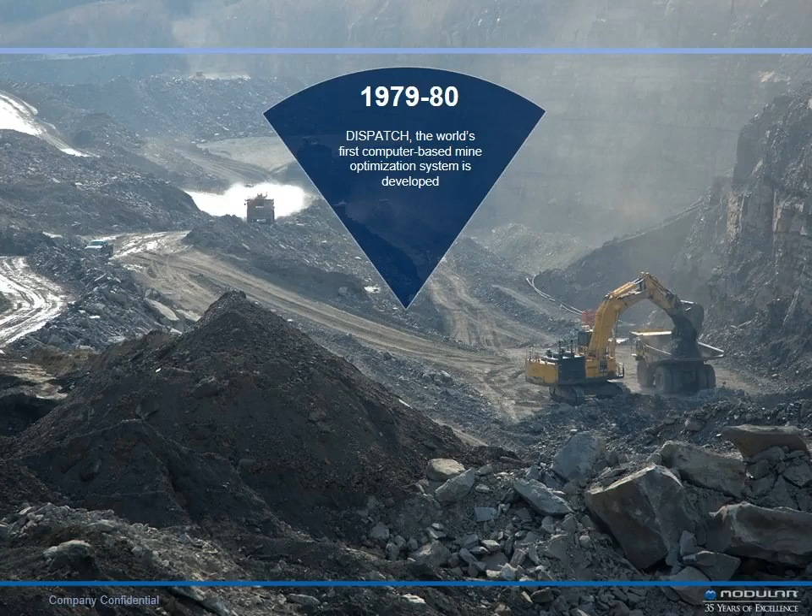So first, 35 years, if I can subtract adequately, that means 1979 is when we started. Shortly thereafter, in 1980, we launched Dispatch, the world's first computer-based mine optimization system.

The next few slides here will go by decade. In the 1980s, we implemented the operator interface panel and RF signpost beacons, and the first Dispatch underground system was commissioned.

In the 1990s, GSP Modular Ready interfaces were released, and today we have far and away the most interfaces on the market, meaning we integrate with varying equipment types. We also released field solutions with GPS technology. That was at the dawn of GPS. It's so ubiquitous today it hardly seems worth mentioning, but at that time it was rather substantial.

In the 2000s, we became part of Komatsu, one of the largest heavy equipment manufacturers in the world. We co-developed with Komatsu the front-runner autonomous haulage system, which may be on some of your sites. We expanded our OEM interfaces to over 100, our mining services division was formed, and we were installed in our 200th mine.

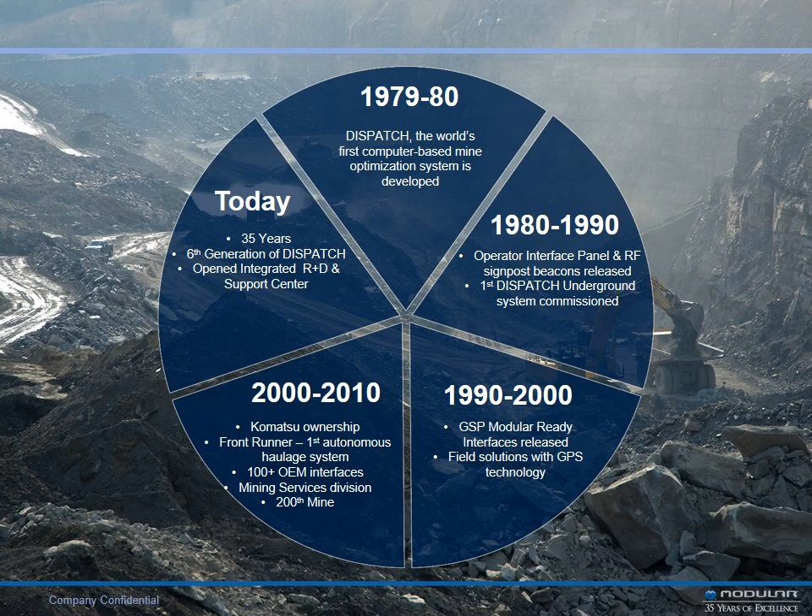That brings us to today, 35 years in business. We're now on our 6th generation of the Dispatch system. Recently, I believe in February earlier this year, we opened our brand new Research, Development, and Support Center here in Tucson, Arizona. Those are some of the achievements. There are many more, but to keep it brief, we organized it by decade to show you something brief.

What we haven't done is show you some of the results. We focused on products, global presence, etc. But here are some of the outcomes from those products and offices in our 35 years in business. We've labeled them according to what we feel we've accomplished and established with our customers. The first is trust, and we feel confident we've established the trust of our customers because we're in 18 of the 20 largest mining companies in the world.

Next, results. We've proven production at 240 plus mine sites. Each of these follows a rather linear progression. This data was surveyed via our internal resources and our customers, so that number is right: 70 billion tons of additional production due to our Dispatch system. It's not often you say 70 billion.

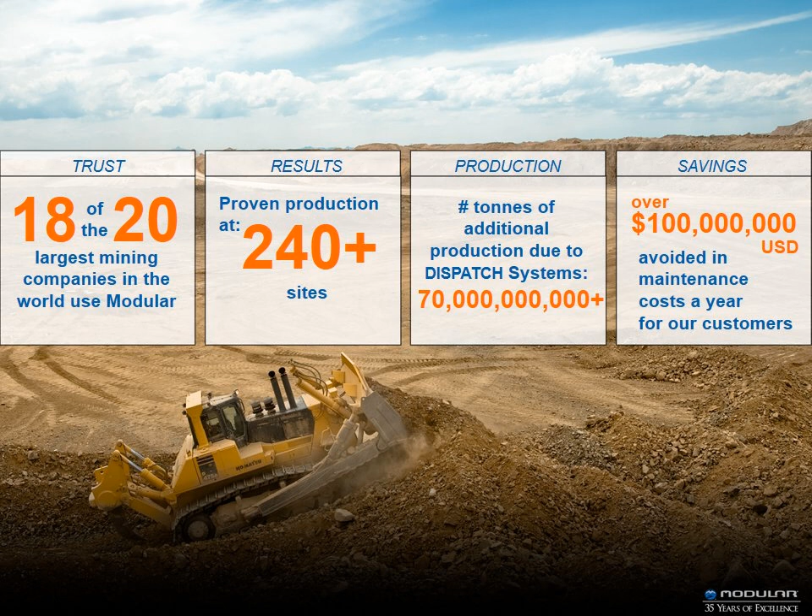And finally, what matters most: savings. With our solutions, we've saved our customers over $100 million in maintenance costs. We think that's substantial.

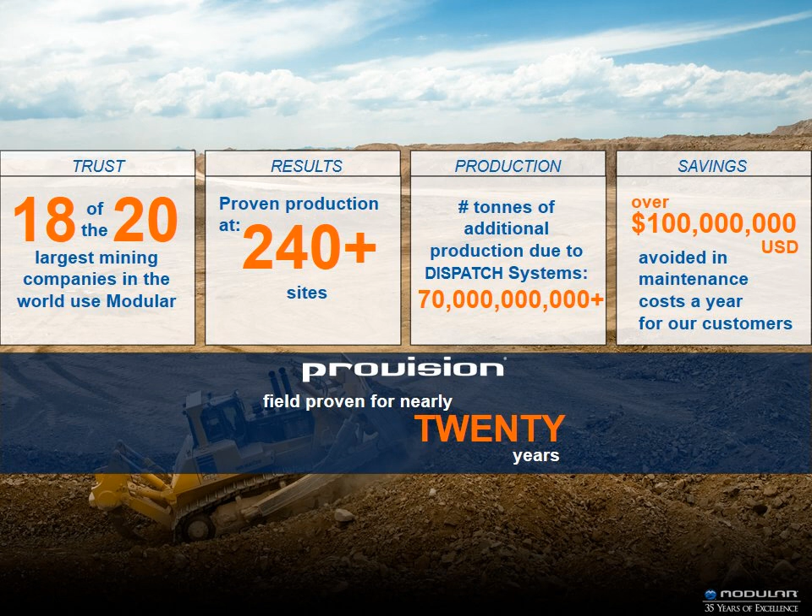And finally, to segue into our topic today, ProVision. ProVision has been on the market for nearly 20 years, and in that time we've provided integrations with heavy equipment like loaders, shovels, dozers, and of course drills, the topic of today's presentation.

So without further ado, I would like to hand it over to Bill, who will go into more detail about machine guidance and specifically our drill system. Thank you, Eric.

Welcome everyone. Let's talk a little bit about machine guidance in general before jumping into the drill. You want to jump? Actually, I can manage this, can I?

We've already talked a little bit about our history, so I won't go too deep on this, but you can see how ProVision kind of starts for us back in the mid-1990s. We were pioneers in this area. We were the first to offer a shovel guidance system before it was actually called ProVision, and we were the first to use augmented GPS, meaning GPS plus the Russian GLONASS satellite system.

There are a couple notable points through this history. We added drills in '99, we added dozers in 2001, and the product line continued to expand. In 2003, that was our first major system redesign, so you could consider that the kickoff for ProVision 2, the second generation. That was Masterlink technology, when we moved to Wi-Fi for higher speed communications and higher bandwidth. In 2009, we added the backhoe, which completed the product line we have today.

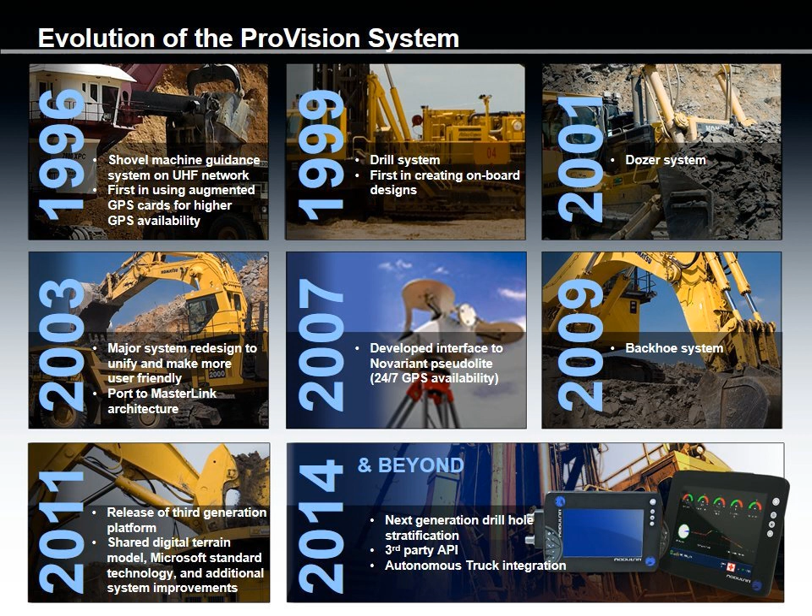For the future, we're working on a lot of different things. These are just a couple of items. Next generation hole stratification, that's actually something we're releasing now. We've got a third-party API for mine planning systems in order to work with different geology and planning systems on site, avoiding flat file transfers between those systems. And we'll be working shortly on integrating our autonomous truck management system into ProVision for the future.

So how does ProVision work in general? The concept is about all this information flow that you see here. It starts with mine planning. All of the information from mine planning is input through the Office application, things like design surfaces, polygons for material boundaries, hazard locations, work limits. All of these things are put in and shared with the mobile applications in the field based on their positioning, so when they need a particular set of data, it's provided in real time over the network.

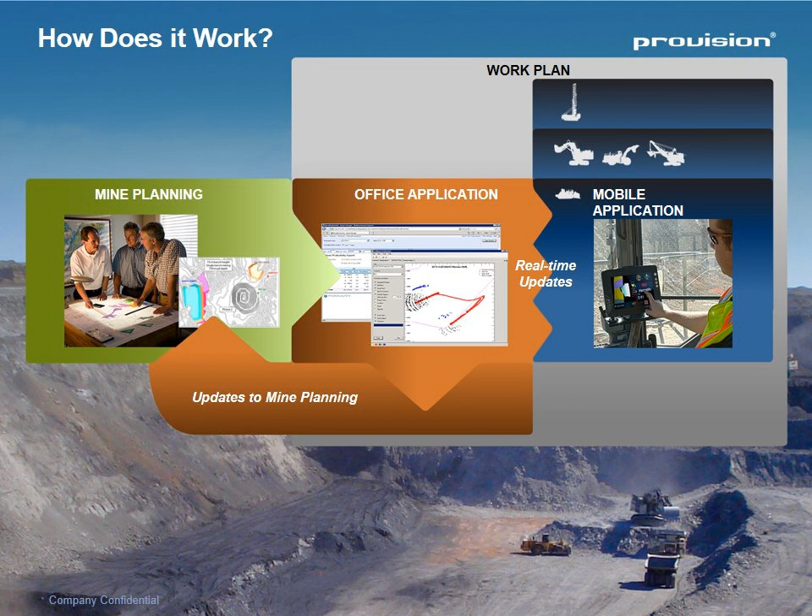And this feeds back into mine planning, where they're able to pull out this data, update their models, or run reports—there's also a set of reports included in the system. So the point here is that the mine plan updates the work plan, and the work actually going on in the field comes back and continues to update the mine plan. So there's this circle of communication which is constantly going.

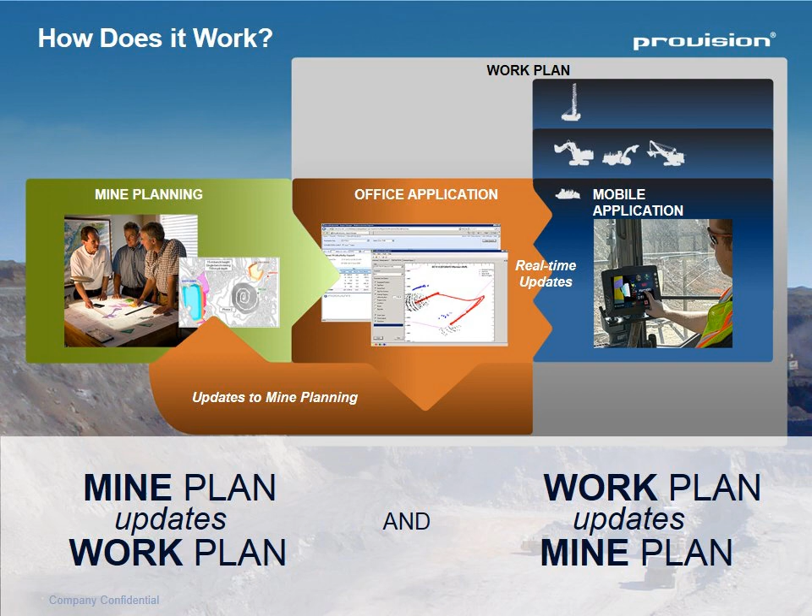So basically, a couple major points here for ProVision in general. The whole point is to have a universal mine plan that's communicated out to the field and managed in real time, and this helps to ensure high levels of precision, basically that the work is done according to the plan.

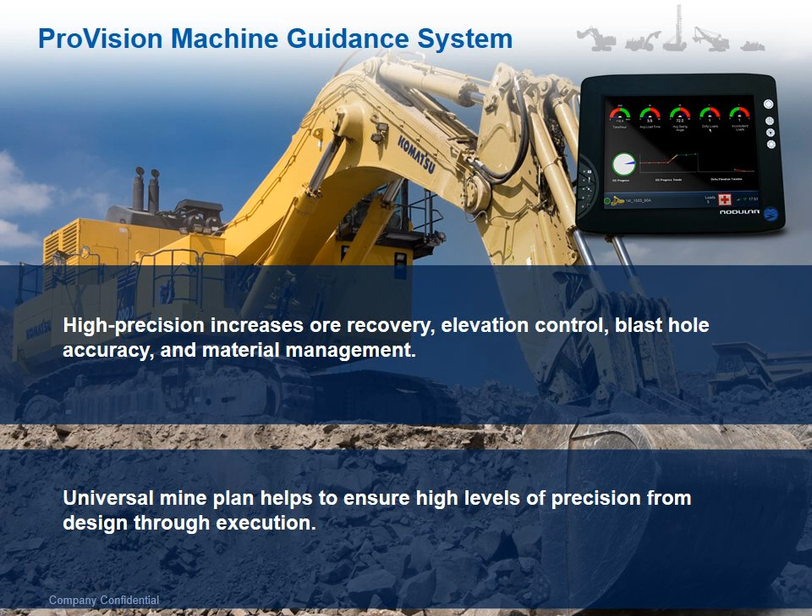And the high precision itself is used to help operators increase ore recovery, maintain control of elevation as the machines are working, drill holes accurately, and manage materials. Those are kind of the major functions of the system. And the system provides comprehensive reporting through dashboards and KPIs, and a reporting substructure available in the system to help you understand what your operators are actually doing out in the field.

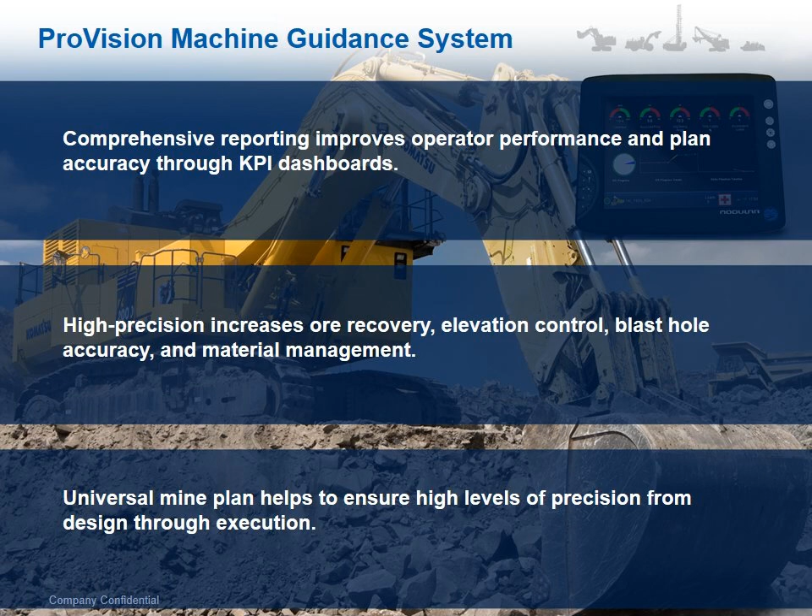Okay, so let's talk about the drill now. The drill is something I mentioned—ProVision 3 was released in 2011, but we've been doing it in phases. It's a big job to migrate all the different machine types we have—shovels, drills, dozers, loaders, and so forth—to ProVision 3 all at once. So we had a phased approach, and the drill is the part we completed this year and released in February. So the drill system in ProVision 3 is relatively new.

Now the purpose of it is essentially the same as it always was. Generally it's about allowing operators to drill precisely, showing them how to arrive at the holes and measure the depth as they're drilling in order to improve efficiency of the drilling rig and meet the goals established in the design of each hole pattern. The guidance is done through the application of high precision GPS or GNSS, which allows them to work during poor visibility and at night without the need to put stakes out in the field and mark holes. At least that's what you should be working towards.

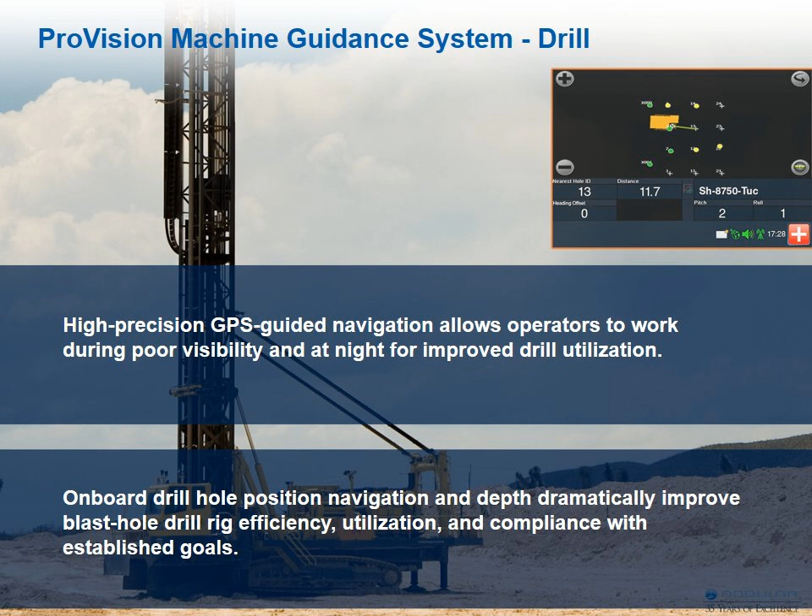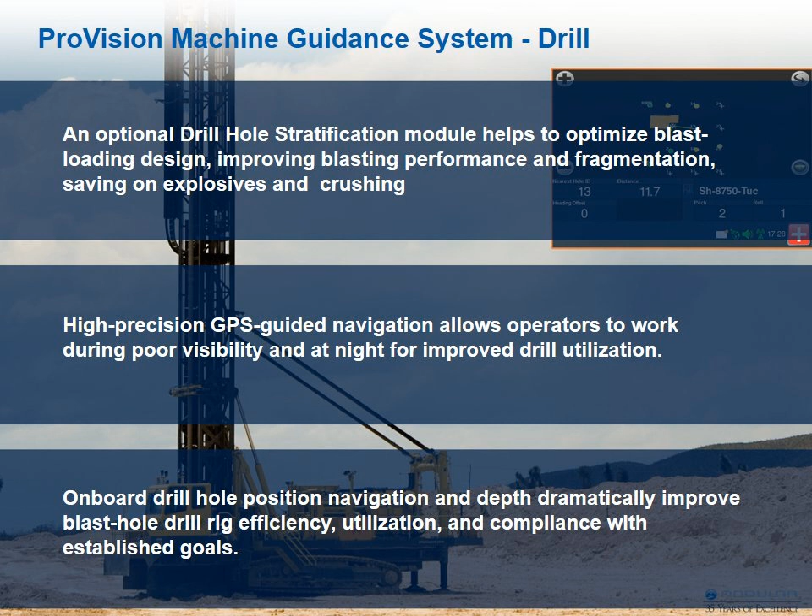And we have an optional drill hole stratification module, which I'll go into more detail on, which is meant to help optimize your blast by understanding the geology in each particular area where the hole is drilling. And there are some big implications for this as far as saving on explosive use and your ability to crush.

All right, so this kind of summarizes the list of benefits that the system provides. The biggest is real-time depth against the design. So basically, this is about better compliance to plan, making sure the drill actually drills down to the depth for each hole, and we're able to measure that very precisely and communicate that to the operator so they know as they're working how they're doing.

High precision navigation is a major piece of that. The positional accuracy can be as precise as 1 centimeter, depending a little bit on the conditions in the mine. The system is developed for the mining environment, and we have a lot of experience with this in our 35 years as far as making rugged equipment and being able to work in these conditions.

Stratification, which I'll go into more detail on, lets us use sensors on the drill, either OEM sensors or our own installed sensors, to get drilling energy per hole. That can turn into recognition of the strata of the hole, the types of rock you're drilling through, and help with optimizing your blasting.

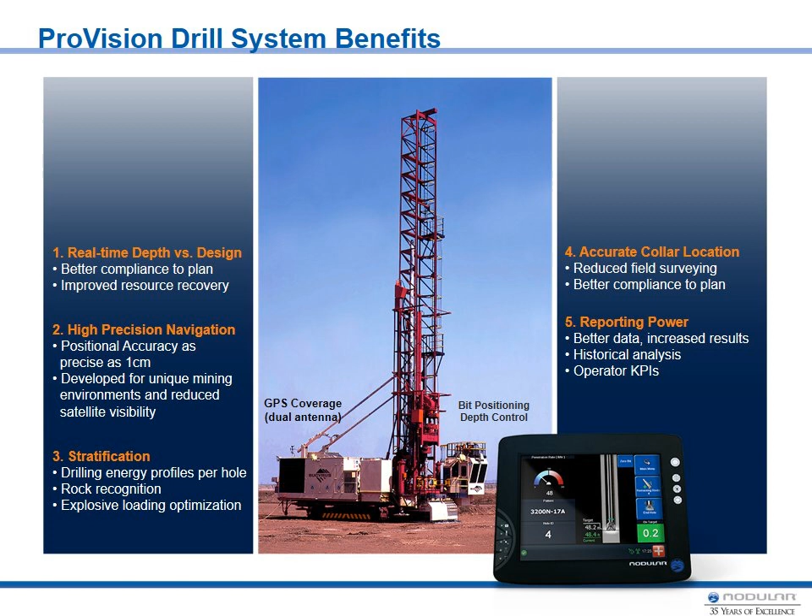Accurate collar location is about getting the hole exactly where it's supposed to be without needing to survey it and mark out in the field. And then reporting: with better data and better understanding of what you're doing, you're able to have better results. That's a fundamental piece of the system, providing that feedback and helping you understand how the operators are working.

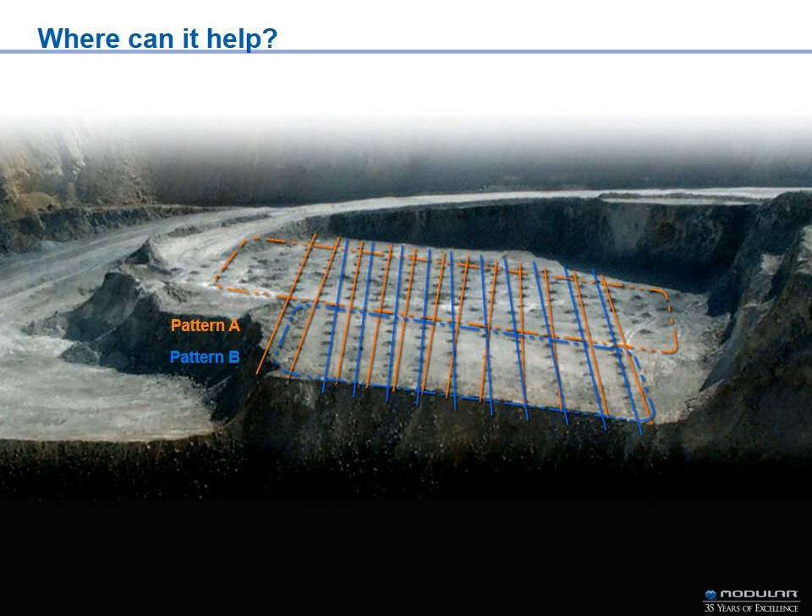Here's an example of what we're trying to avoid. I'm not sure what the circumstance was in this image, but you can see two different patterns here — the holes were drilled one way on one side and another way on the other side. The problem is this causes inconsistency in the spacing between the holes and can affect the quality of the blast, resulting in poor fragmentation, which then makes it difficult to actually extract the material. So we want to avoid this — we want very precise hole placement and depth so these blasts are as efficient as possible.

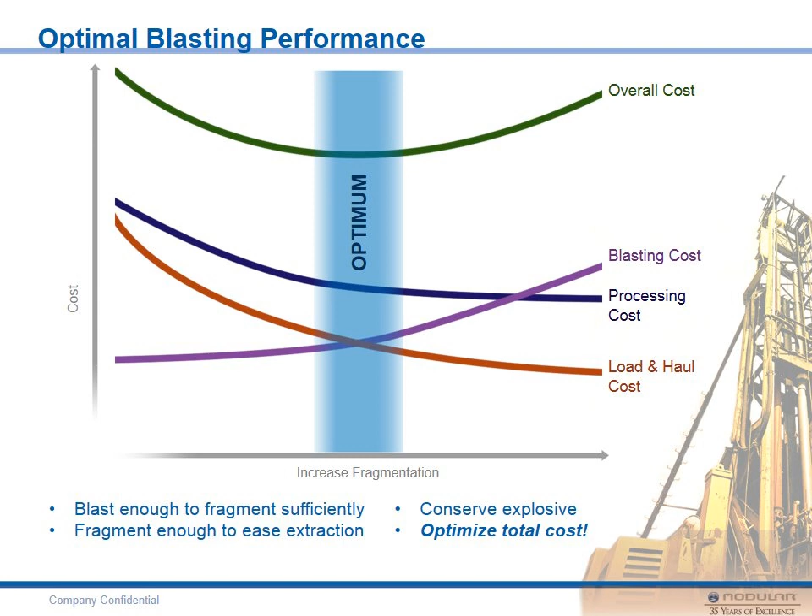So the point is to optimize total cost, and this is what the drill system using stratification can help you achieve. As for how stratification works, as we're drilling the hole, there's a lot of data we can pull from the various sensors on the machine.

Some of these sensors are part of interfaces we've developed over the years, which Eric mentioned earlier. We have a number of drill interfaces that currently exist for Atlas Copco, Bucyrus, CAT, and others. It's a little different whether it's an electric or hydraulic drill, but generally we use RPM, pull down pressure, torque, and penetration rate.

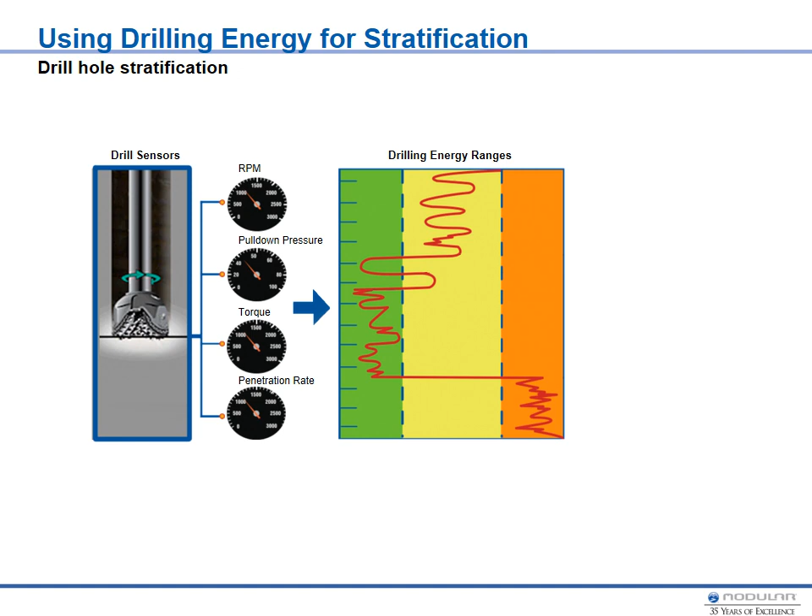By putting these factors together, we're able to calculate the drilling energy. If you look at this chart, it's flipped on its side — top to bottom corresponds with the depth the bit is at, and you can see the energy plotted, where more to the right is higher. Depending on the geology at your mine, you can define limits and understand that when the drilling energy is within a certain range, you're drilling a certain type of material. This helps you identify exactly what it is that you're drilling through — it turns into a stratification profile for each hole, gathered in real time and stored in the central database for you to analyze and use as feedback to design a more efficient blast.

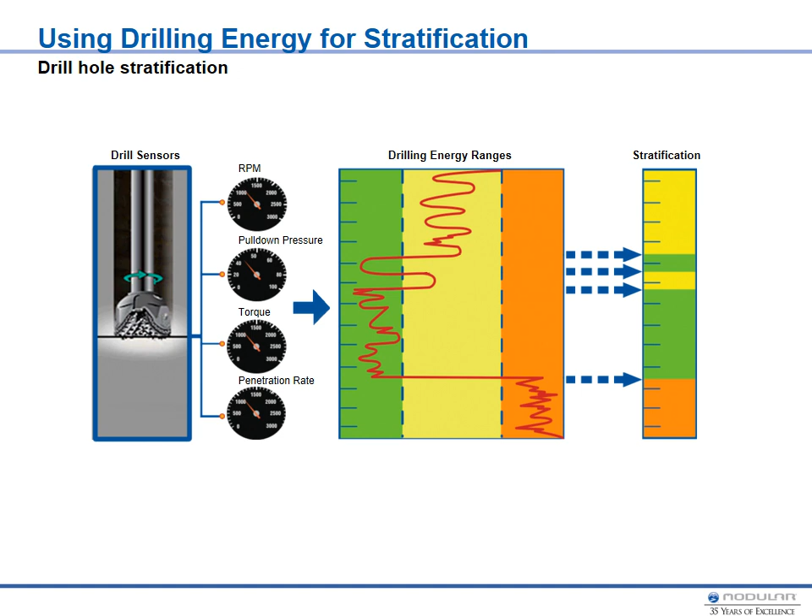Obviously cost is a big factor, and I showed you how that can be done in terms of improving fragmentation, improving load and haul efficiency, and helping at the crusher and at the mill.

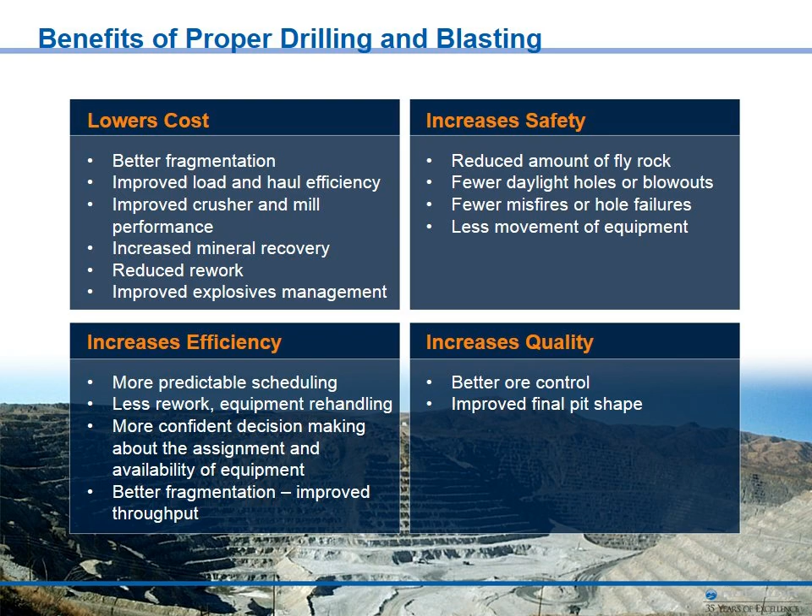So we've got a specific example of where this was applied. There was a case study that we did a few years ago, using stratification with our ProVision 2 system.

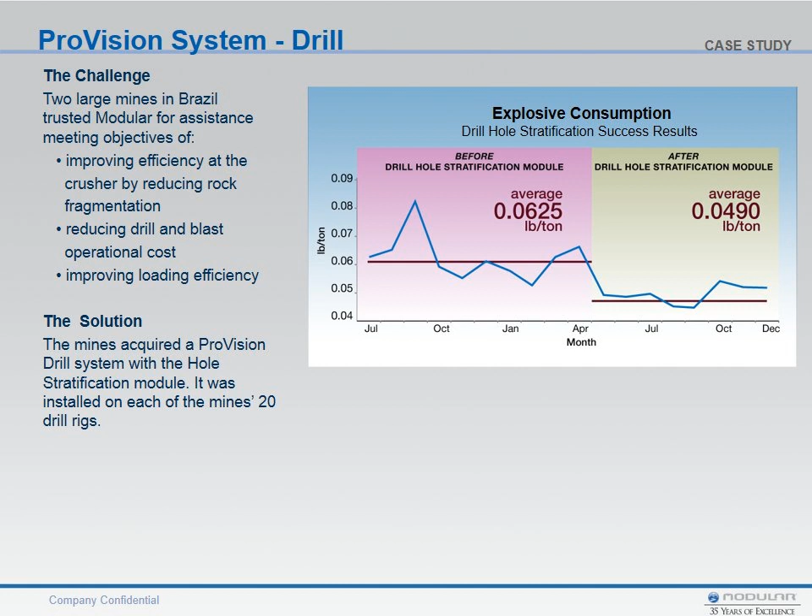Before, they were using ProVision with stratification to try and manage this more closely, and after. You can see the improvement is pretty dramatic: a 21.6% overall explosive consumption drop, and the costs at that site were reduced close to $800,000 on an annual basis at that mine site, or at those mine sites.

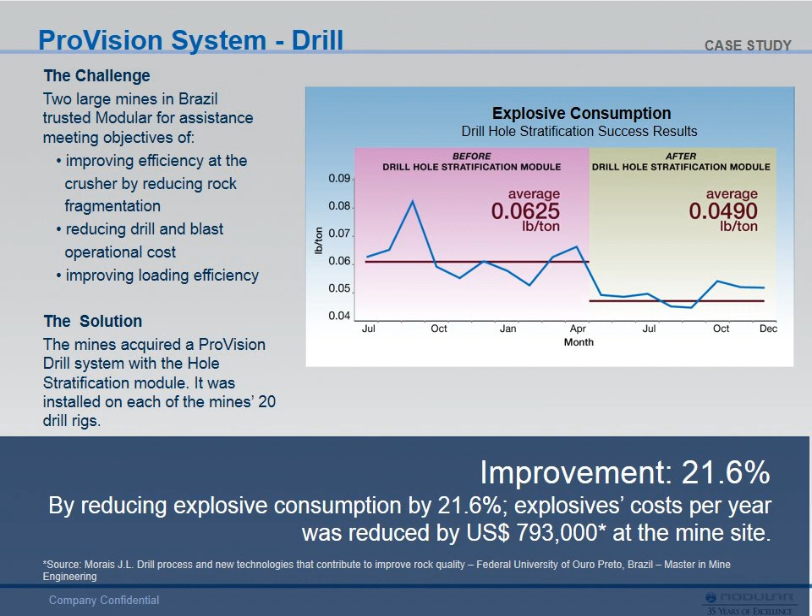So let me show you a little bit what the system actually looks like. Some examples of the mobile application.

The system is ProVision Drill, which is not new for us, but this generation is. So the screens have changed. We have a new user interface and a new design, and we're pretty proud of it.

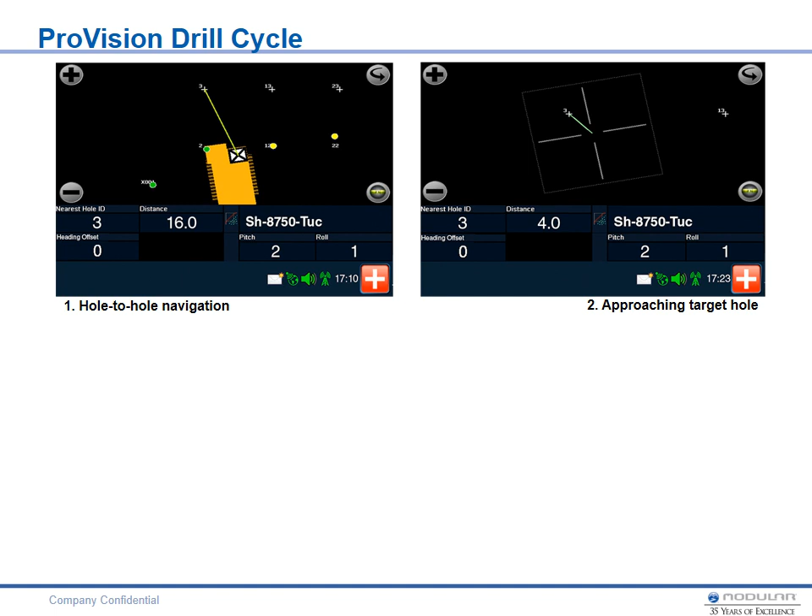As they get close to the hole, they get a zoomed in view so that they can fine tune their positioning in order to get right on top of it. In this particular example, they're still about 4 meters away, or 4 feet away - it's probably more correct, this is probably a U.S. example. So the nearest hole ID is shown, the distance, and pitch and roll information.

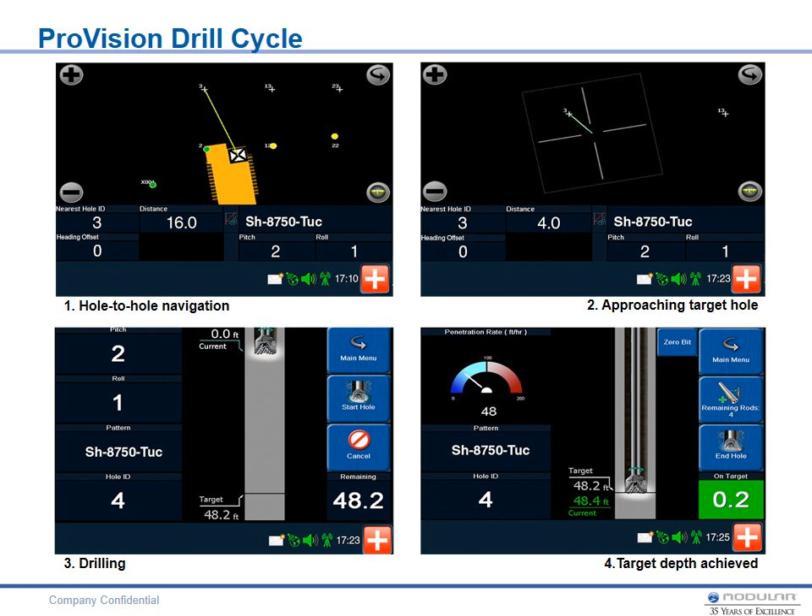And when the bit gets close to on target, there's a beeping sound and alert to the operator to make sure they're aware so that they don't go too far. Now, if they do go too far, there's a yellow blinking that starts to happen, which basically warns the operator, trying to get their attention so that they know they're over drilling.

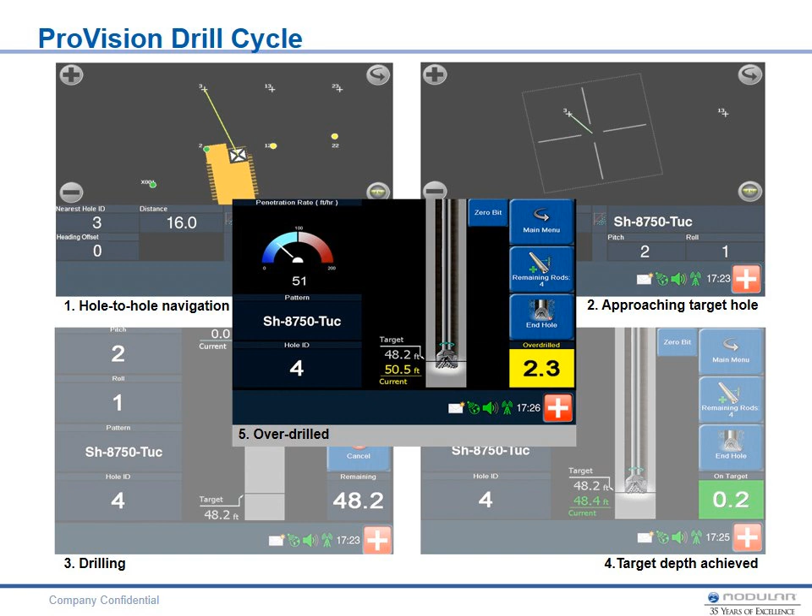All right, so after this, it goes back basically to navigation. That's the basic drill cycle on the PTX for the operator.

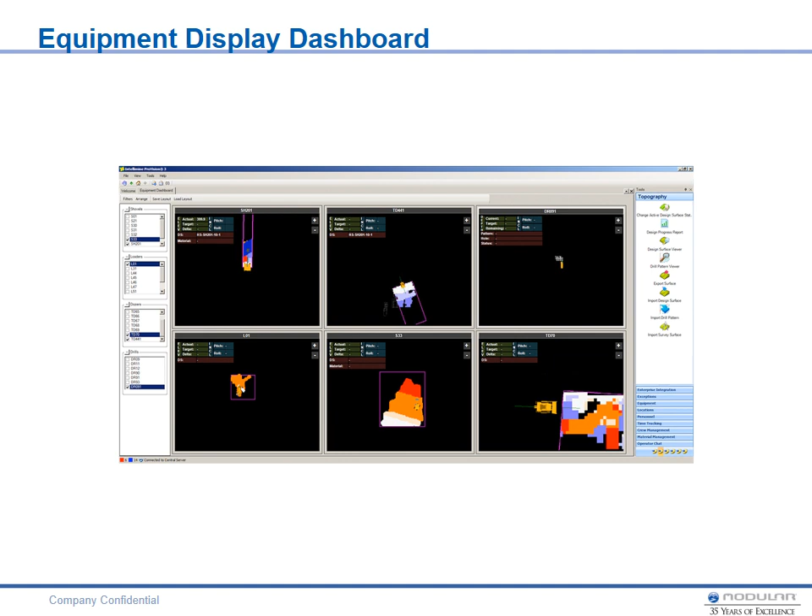In the field, what's going on for each unit - it's nice for dispatchers or for mining engineers who are charged with keeping track of what's going on in the field. They can choose to see only drills if they're interested in drills, or a mixture of any different type of ProVision units. But basically, they've got this visual indication of what's going on.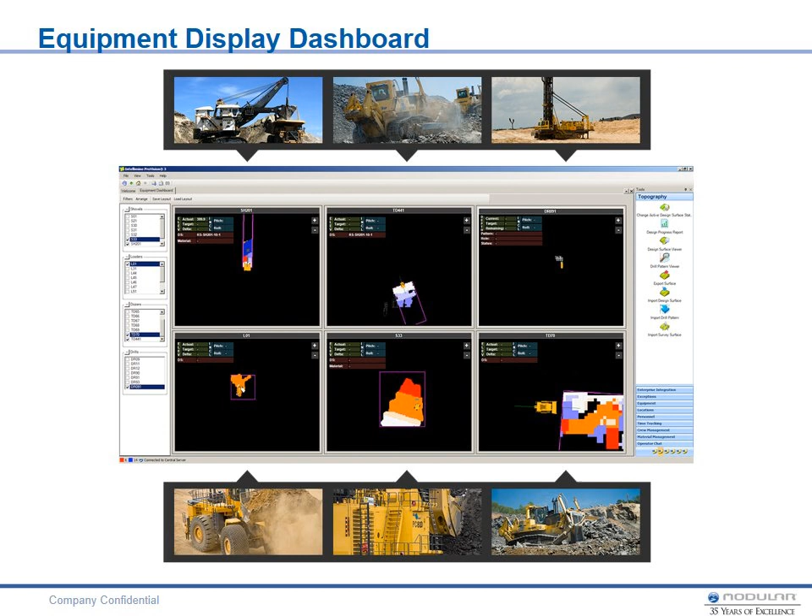All right, so it seems like I flew through that pretty quickly. It was really meant to be a kind of short overview and an introduction to what we're trying to do with the drill system and what we've got available. So at this point, I'll open it up and see what kind of questions we've got, and hopefully I can answer any questions that you have.

So we have one that's rather common, I suspect. How long might it take to install a ProVision drill system? Yeah, so the time in order to install the system, there's kind of two parts to that.

One is getting the hardware on site. There's a fair amount of hardware with the system - the screen, the GPS receiver and antennas, and other cabling and so forth. So we put all that together and get it on site.

Usually takes us about 3 months for that lead time. The installation on site is relatively quick - it only takes about a day to do a hardware installation on a drill. It might be 2 days. It just kind of depends on availability of the machine and how many people are working on it.

The installation of the server, if you've already got ProVision 3 server, it's just a little bit of configuration. But if you don't have any ProVision 3 at all, then the server itself is going to take some engineering time to install and configure, and to do some training to show your people both in the office and in the field how to operate the system. So it's a little bit variable, but it's usually done within a couple of weeks. Could be longer, just depends how many units you're working with.